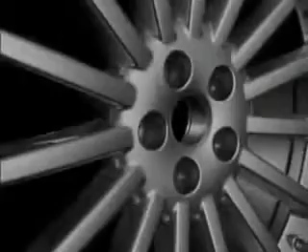They're like shining rings, sparkling jewels, the ultimate expression of an automobile. Emotions and passions focus on them. Their light alloy metal is seductive. Their gleaming brilliance radiates sheer power. Wheels are the finest feature of any car. BBS, driving in its finest form.

This expressive power has always been closely associated with motorsports. Look at a winning vehicle and you're looking at BBS Wheels. All over the world, in different racing series and successful teams. Pole position in light alloy construction, world champions in series quality, world record holders in heavy-duty stability. It was the racing fever at the world's leading motorsports events that produced the BBS myth and developed the BBS brand.

BBS wheels are elegant. These giants of the sports world are naturally discreet. They don't need to prove a thing. It's this confident sense of style that car drivers and car makers appreciate in equal measure. Form following function, and lines based on mathematical curves that create the ideal line in every curve. Dynamism defines the appearance. That's the distinctive feature of BBS.

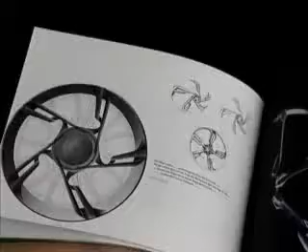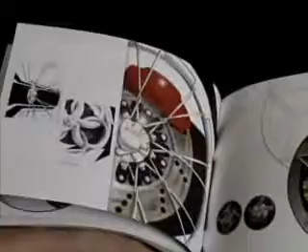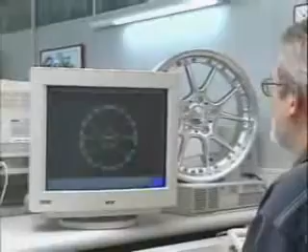Cooperation with highly regarded designers keeps the formal language fresh and satisfies customer-specific brand worlds. Within this creative network, maximum customer orientation and flexibility have proven themselves again and again. Development is teamwork on the customer's premises, ideally in a standardized software environment with problem-free interfaces for the transfer of data models and simulations. Achievements are passed on, results are maximized.

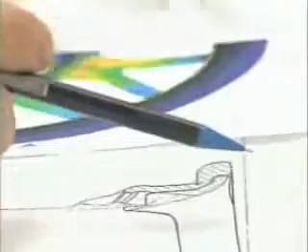At BBS, development primarily involves innovation, and that's why we don't need to keep on reinventing the wheel. Special development modules enable fast results within the cost targets. Simulations allow us to reduce the number of potential solutions down to a small number of finalists. But it's still the test benches that provide the ultimate results.

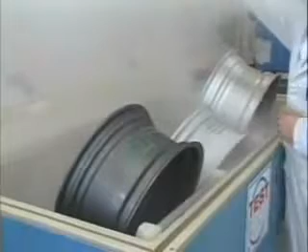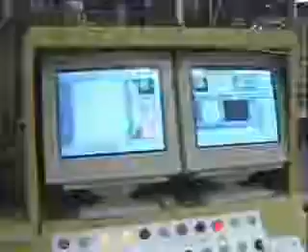BBS has a comprehensive testing area with all the testing equipment used to verify the usual standards and specifications. At the same time, our in-house requirements are far beyond those of the legislative and testing companies. After all, at BBS, every wheel has to be able to withstand the extreme conditions of motorsports.

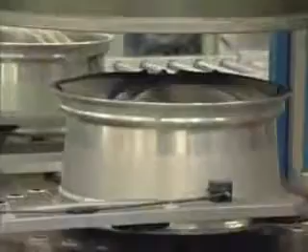Various factors have to be coordinated with one another, such as light alloy construction and stability, aerodynamics and brake cooling, or design parameters and production optimization. Add the highest processing safety and you have a high-grade quality product.

BBS has several production plants worldwide, all working to the same high standards. All car manufacturer certification guidelines are fulfilled. Our ultra-modern process-oriented and self-organizing structures reflect the state-of-the-art in plant technology.

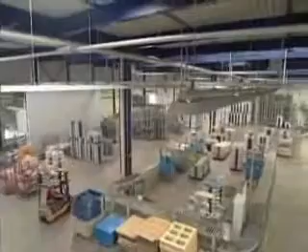The hall layout enables different plant levels, tool changes without production interruptions, parallel production of large and small batches, and redundancies in process-critical applications. Reallocation of capacity on the fly takes place in all our production plants worldwide.

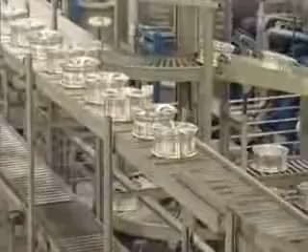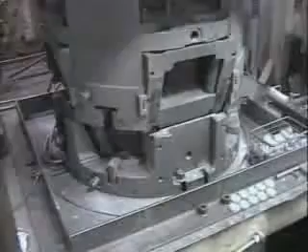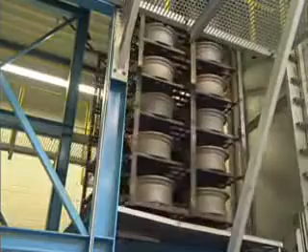The production process begins with fully automatic low-pressure casting machines. The alloys are standardized, but the decisive difference is made by the timing of the processing steps and also the details of our tool construction, like temperature control, for instance. During the several hours of heat treatment, the material properties of the future wheel are precisely adjusted. After the solution treatment furnace, the aluminum structure has the required strength and elasticity for operation.

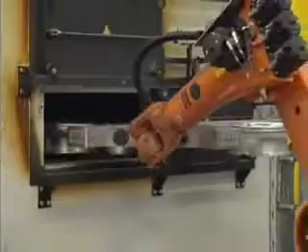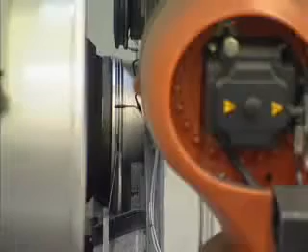In another furnace, the wheel is reheated to the ideal temperature of 300 to 350 degrees. Then it is mounted concentrically on a negative mold. In a uniaxial movement and under high contact pressure, a continually lubricated roller head creates a rotational profile. It's done on the principle of the potter's wheel.

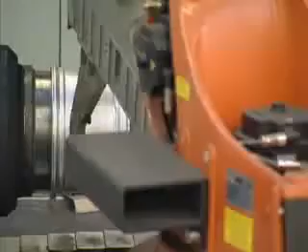The heated metal is simultaneously molded and compressed. This results in more stability, combined with less use of material and less overall weight. BBS is considered the pioneer of this process. It's known as flow forming.

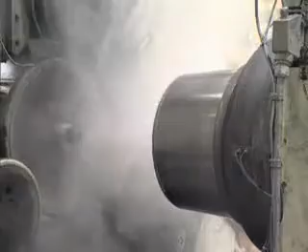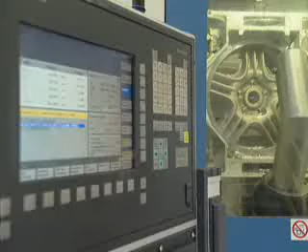After casting, the sprues and burrs are removed in a fully automatic CNC machining station. Bolt holes, the valve hole, and the center bore are also drilled. This is now done dry at BBS. Liquids, which are normally essential for cooling and lubrication during these machining processes, are not added. The overburden is fed straight back to the melting furnace.

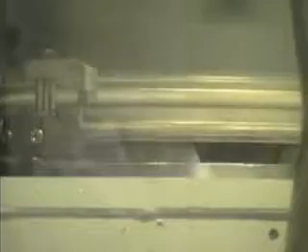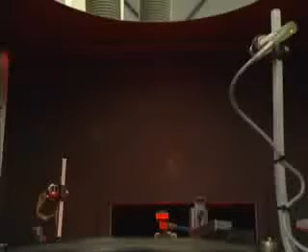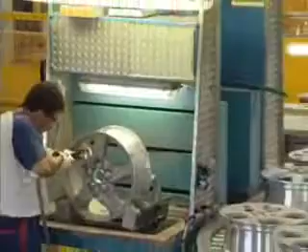BBS specializes in this dry machining process, which has won several awards. The entire station is hermetically sealed in order to prevent any emission of aluminum dust. Infrared sensors guarantee the precision of all contours. With special wheels, the deburring process is still done manually. Largely automated conveyor technology guarantees steady material flow between the machining stations.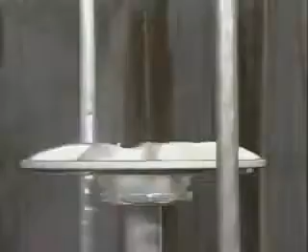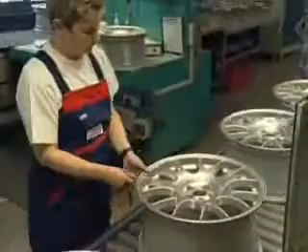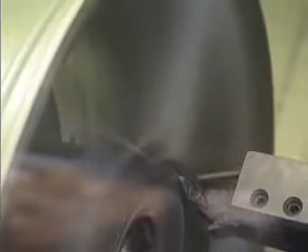The double-thick layer of varnish sharply improves scratch resistance and anti-corrosion properties. One reason why the use of BBS wheels in winter conditions is unrestricted. Diamond-cut BBS wheels are especially popular. They owe their deep and brilliant luster to a special technique. After application of the coating, it and the aluminum surface are partially polished on automatic lathes using a diamond-tipped tool. This creates a highly attractive alternating pattern between polished and unpolished surfaces.

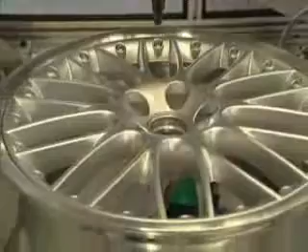High-quality modular wheels are an integral feature of the BBS brand. Forged spokes and flow-formed rims can, for instance, be combined to form an ultralight wheel. The sections are connected by titanium fasteners.

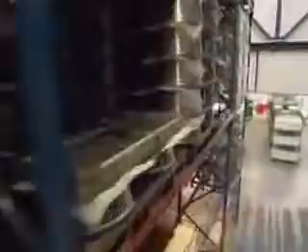OEM demands delivery to car makers, just in time and just in sequence. On the other hand, the aftermarket is characterized by seasonal cycles and fluctuations in demand. These extremely different requirements have to be satisfied by production and logistic planning, from mass production of millions of wheels to a single prototype wheel in motorsports.

With the GTI wheel of the VW Golf 5, an entirely new process of hollow space wheel construction has reached series production. The hollow outer shoulder is created via flow forming without the core being lost or enclosed, a world first in automotive engineering, a breakthrough in cost effectiveness. Hollow space wheel constructions can be made viable in the volume segment.

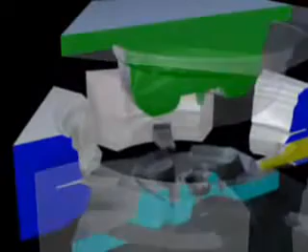The inner shoulder can be formed in just the same way, with considerable benefits with regard to costs, stability, and mass moment of inertia. Combined with the slide casting process for the spokes, complete wheels with airtight hollow spaces can be realized in a self-contained production process. This is Air Inside technology from BBS.

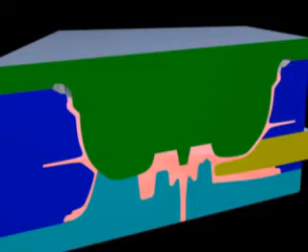Air Inside technology is a good way of demonstrating how the strengths of BBS work together. Restless pioneering spirit, operational excellence, complete command of processes, intensive cooperation with customers, and systematic market orientation all combine here to create a key technology in chassis construction. Less unsprung masses and improved temperature dissipation increase comfort, handling, and safety.

The airtight hollow spaces enable new approaches to tire pressure compensation while the vehicle is in motion and reduce tire damage risks. The achievable ratios between wheel load and wheel weight are exemplary. The wheel design also achieves an entirely new dimension of freedom.